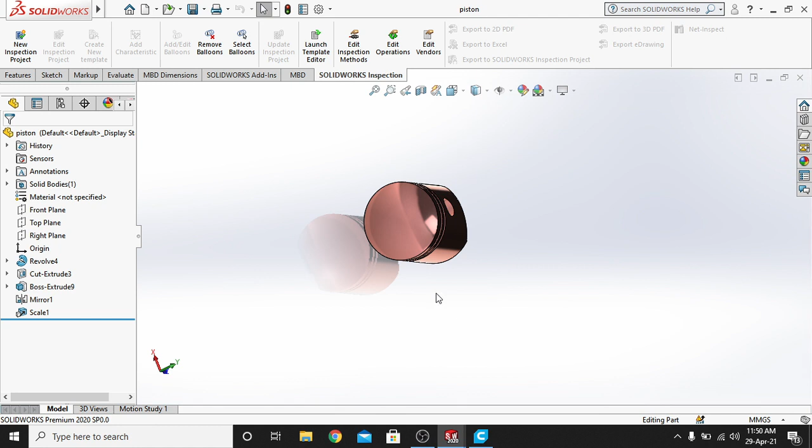So this is basically made up of four parts: the piston, this connecting rod, the crankshaft, and this outer casing, which I've made individually and then assembled in the end. So I'll start with the piston. So this is the piston. To make the piston, what I actually did was use the revolve boss base feature.

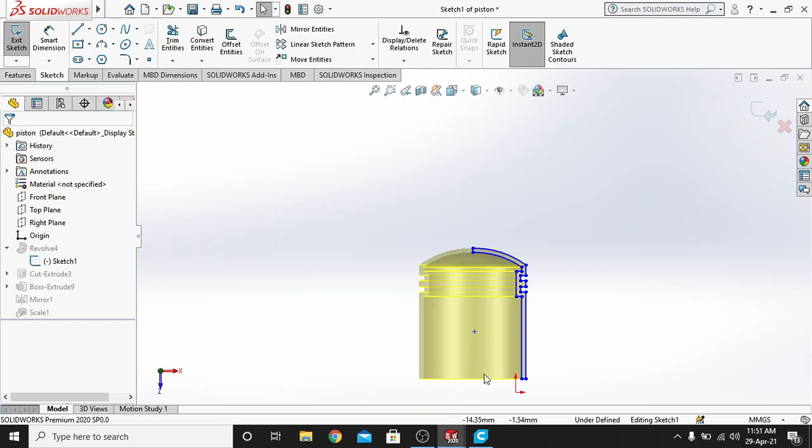So this is the sketch. I actually made the sketch and then revolved the sketch around this middle axis so that I get the piston. So on revolving it we get something like this, and these two holes were made by using the extruded cut feature after making the piston.

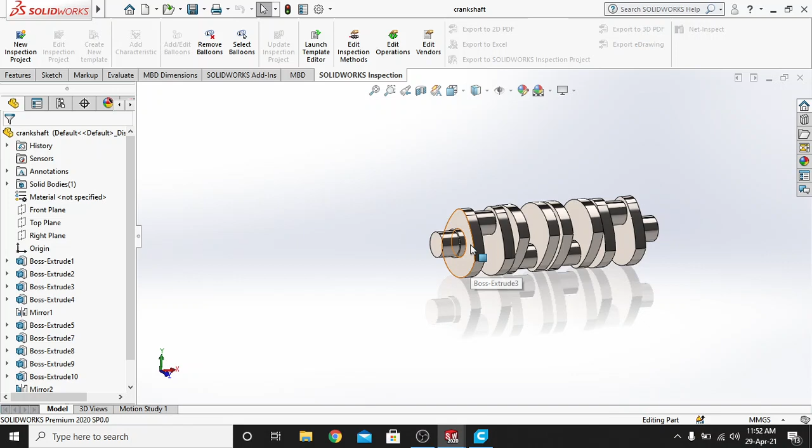Now coming to the crankshaft. The crankshaft part was a little complex to make, so I started with this plate. I extruded it and then used a mirror plane and mirrored this crankshaft about this plane to get this part. Then I used the offset entity feature and shifted the sketch by some distance, then rotated the sketch by 180 degrees and extruded it to get this part, and the same, used mirror to get this. I did this two times to get this entire crankshaft.

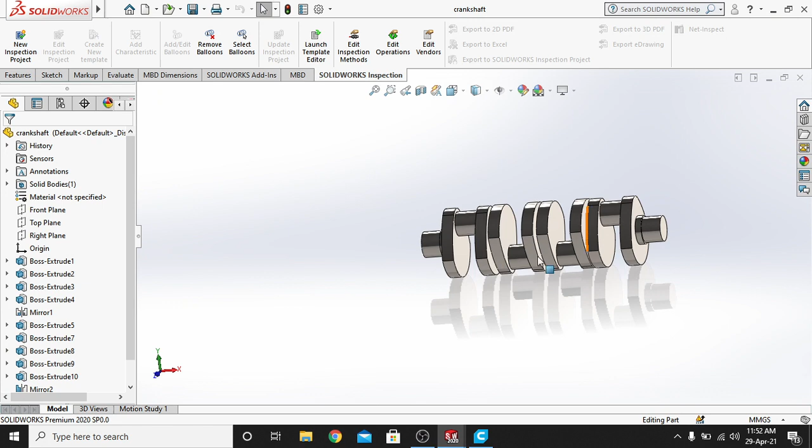Now I have all the parts ready and in the end I assembled them. So I've assembled them, mated them in such a way that this piston is free to move along this line, along this groove, and this crankshaft is free to rotate about this axis.

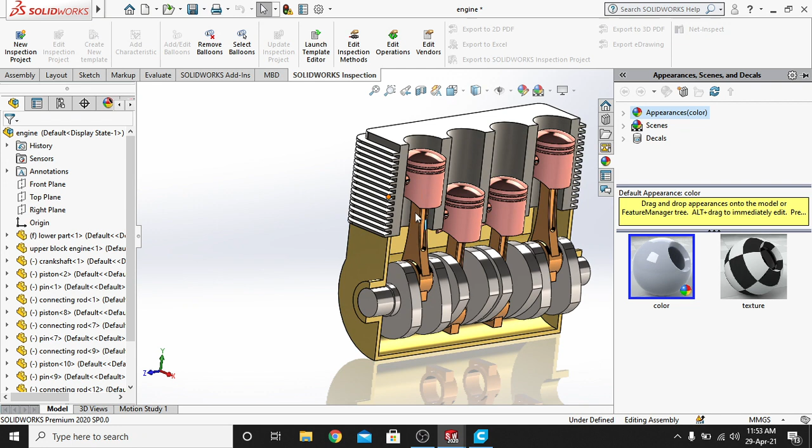I have also changed appearances from here to make it look more visually appealing. I've used nickel, brass, titanium and copper colorings to make it look like a real engine. So I have also made a little animation to show my project.

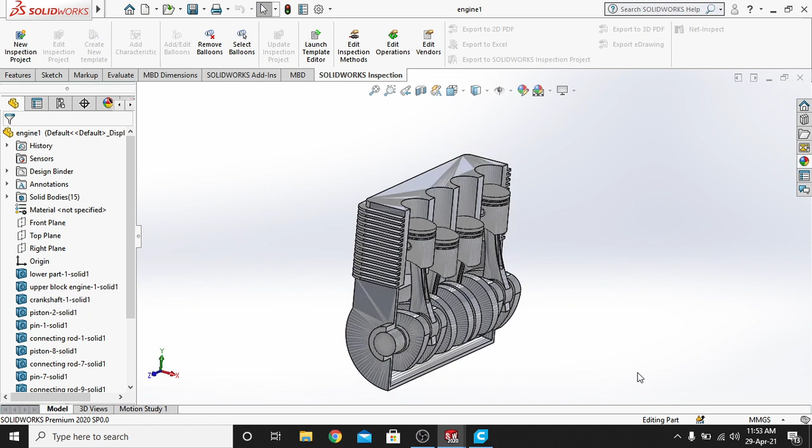So this was it. I have already converted my engine to mesh and imported it to Cura. So this is the mesh body. Now coming to Cura. So here we can see, before I wanted to print all the parts individually and then assemble it, but due to time constraints it was going far beyond 8 hours, so I have imported the whole engine as a single part and then printed it. So here we can see the printing settings.

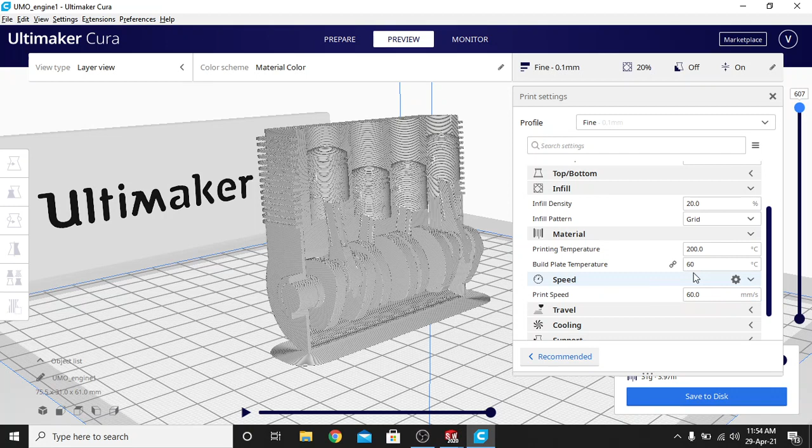The filament thickness is 0.1 mm, infill density is 20%, printing temperature is 200 degrees Celsius, build plate temperature is 60 degrees Celsius, and the printing speed is 60 millimeters per second. So here we can see how the printing goes on. It starts with the base all towards the up, and this was my DIY project.